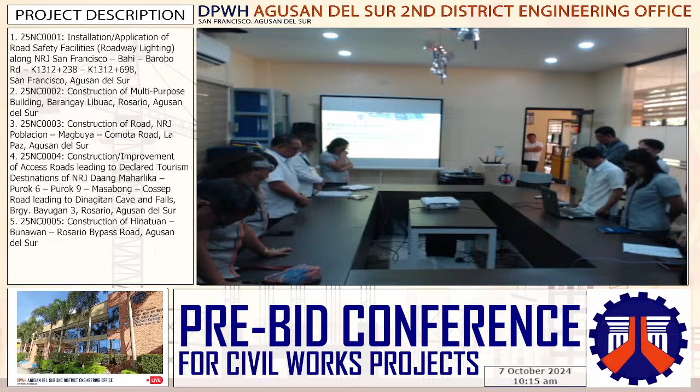In the name of the Father, the Son, and the Holy Spirit. Amen.

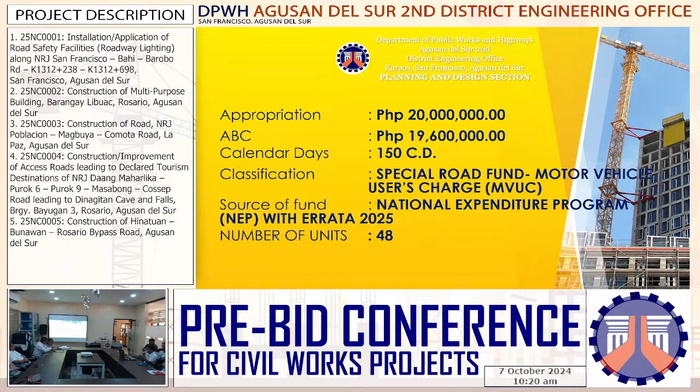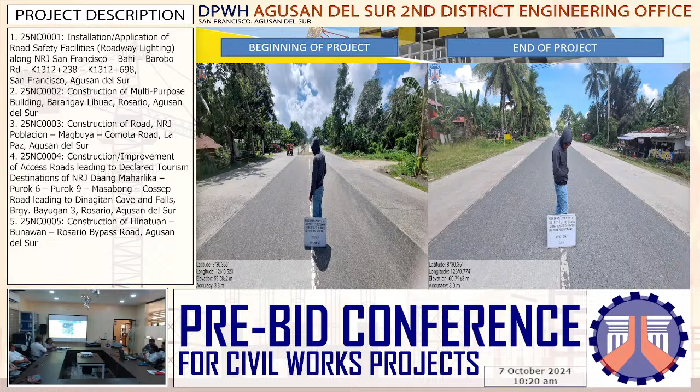So this is the geotagged photo of the beginning and end of the project. And this is the existing solar streetlights along the Bahi, Barobo. So the original plan, the location map, and this is the single arm post detail.

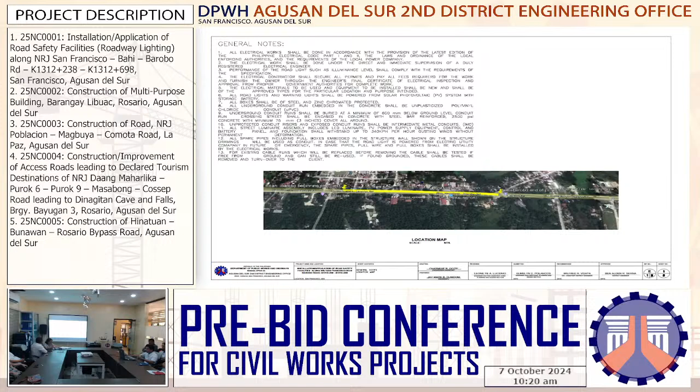So the pole is 12 meters in height with a lower diameter of 250 mm and upper diameter of 150 mm, with a thickness of 4.5 mm. And the mast arm is 1.5 meters. For the LED luminaire details: 200 watts integrated solar street light technical parameters, solar panel monocrystalline silicon, 18 volts, 200 watts.

Battery: lithium-ion grade A, LiFePO4, 35 ampere hour, 24 volts. LED light: industrial grade high lumen chips, 21,600 lumens. Charge time 6 to 7 hours, lighting time 10 to 12 hours per day, 8 to 12 days, up to 20 days. Charge controller: microcomputer intelligent control for circuit protection. Ingress protection IP67, warranty 6 years minimum.

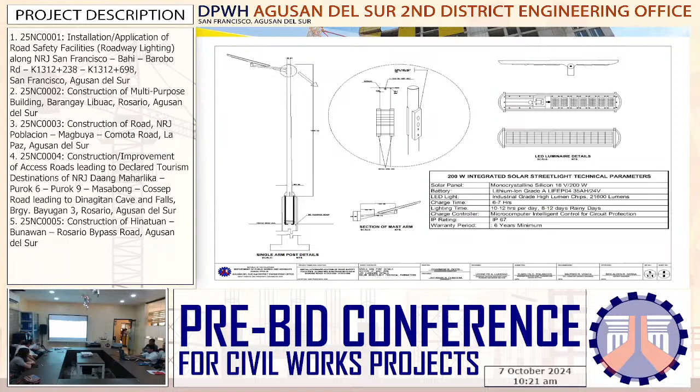For the foundation elevation, the pedestal varies. And for the base plate, the base plate is 500 by 500 by 25 mm. And the lighting arrangement is opposite, or on both sides.

So this is the lighting layout, and the cross sections.

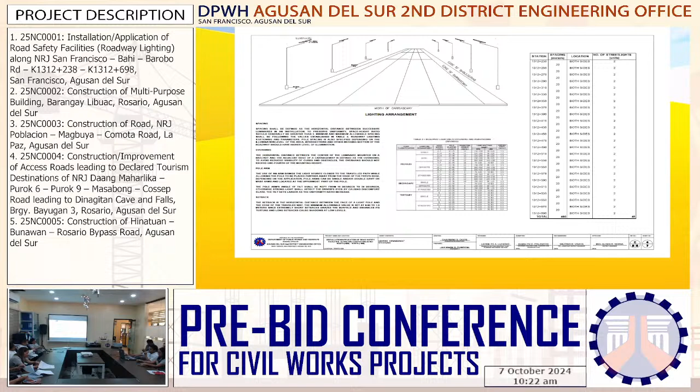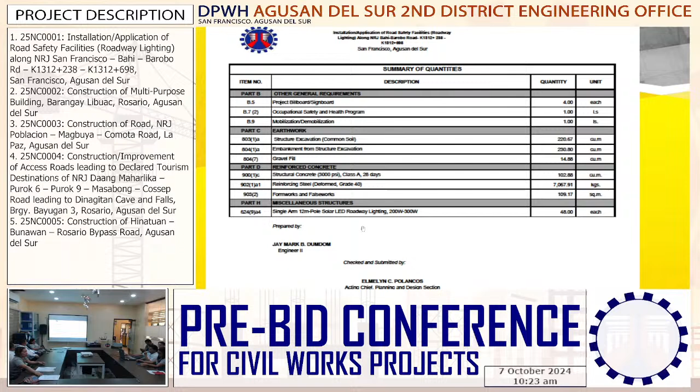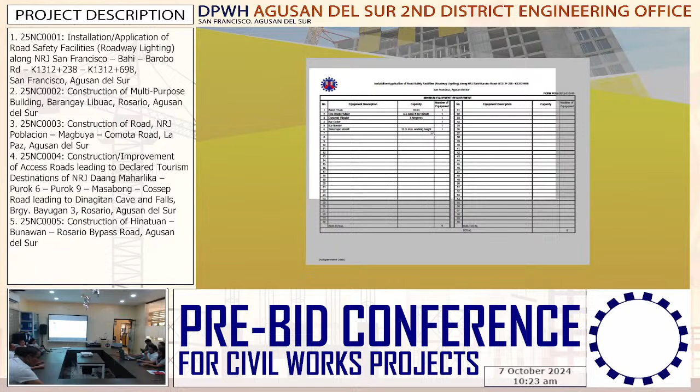For the minimum equipment requirement: boom truck, bagger mixer, concrete vibrator, bar cutter, bar bender, telescopic man lift — 1 unit each. And I think that's all for this project.

Any comments, suggestions from the MAC members? None? Okay, let's proceed to project ID number 2.

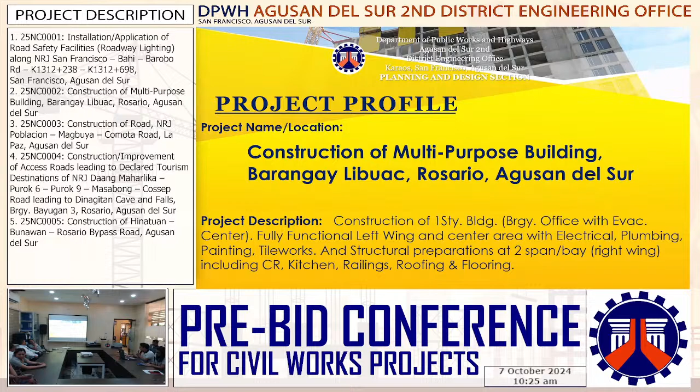Okay, for the next project this morning, the construction of multi-purpose building, Barangay Libuac, Rosario, Agusan del Sur. Project description: construction of one-story building, barangay office with evacuation center, fully functional left wing and center area with electrical, plumbing, painting, tiles works, and structural preparations at two-span right wing including CR, kitchen, railings, roofing, and flooring. Appropriation amount of 10 million, ABC amount of 9,900,000, with a total of 150 calendar days. Source of fund: NEP FY 2025.

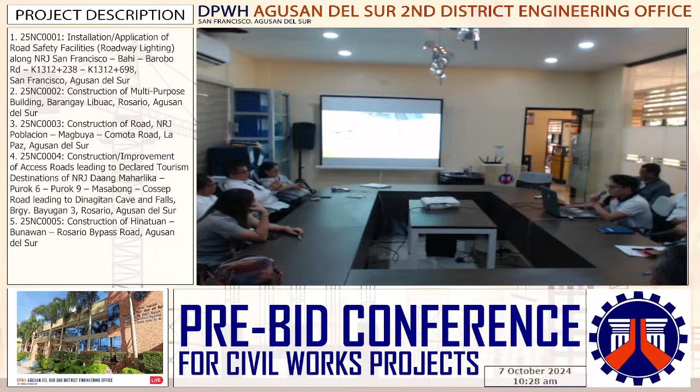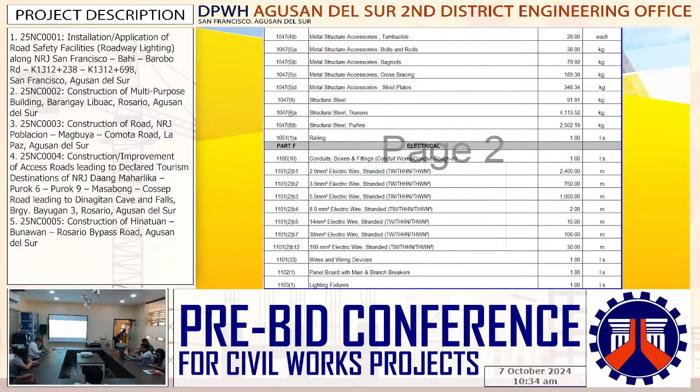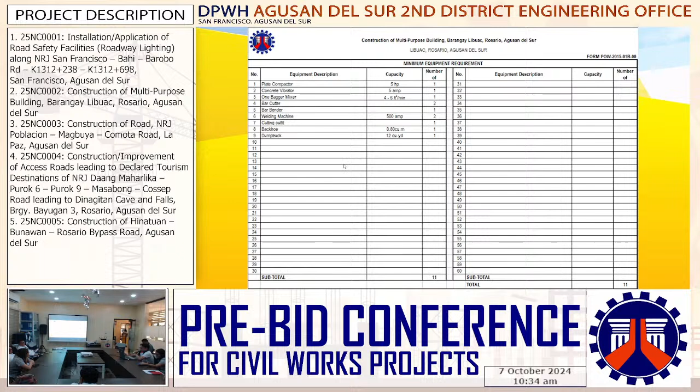This is the minimum equipment requirement: plate compactor, concrete vibrator, 1 bagger mixer, bar bender, cutting outfit, backhoe, dump truck 1 unit, bar cutter, welding machine 2 units.

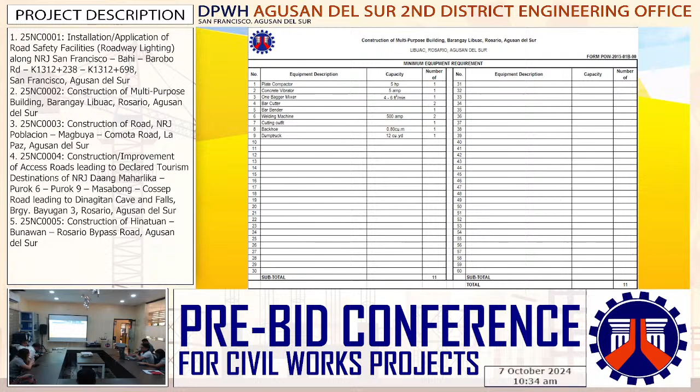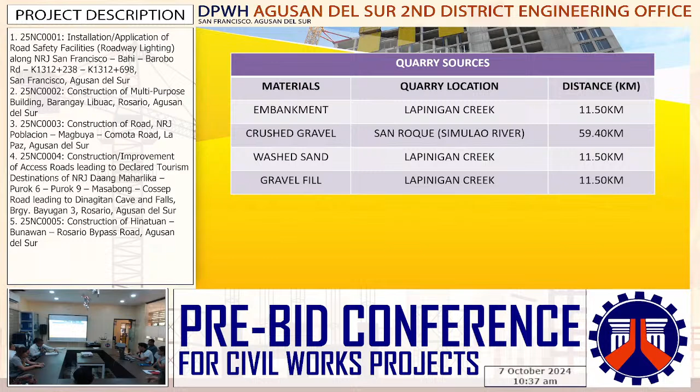Okay, for the MPP at Barangay Libuac, any query, questions, comments?

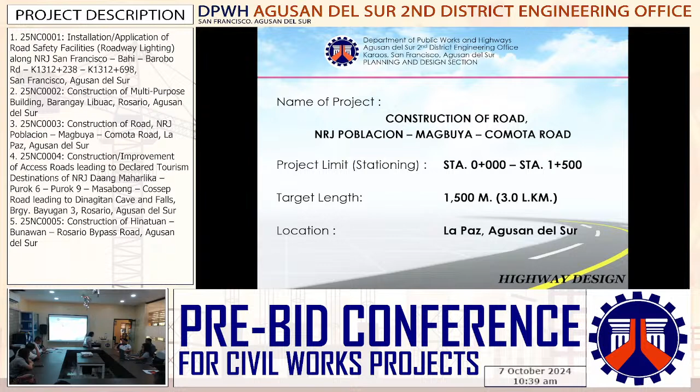For the certification of availability of allotment, road certification, and the original plan and program of works, we have an appropriation of 50 million, ABC of 49 million, 158 calendar days to complete the project, classification road construction, and source of fund NEP 2025.

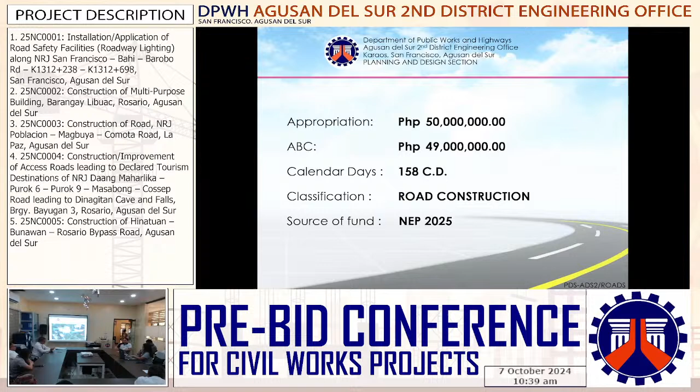So this is the location of the project. This is the existing national secondary road of Butuan City, Talacogon, Loreto, Veruela, Santa Josefa Road. We will have a junction here as the beginning of the project, and the end will be at Station 1 plus 500.

This is the geotag photos taken at the area. This is the junction.

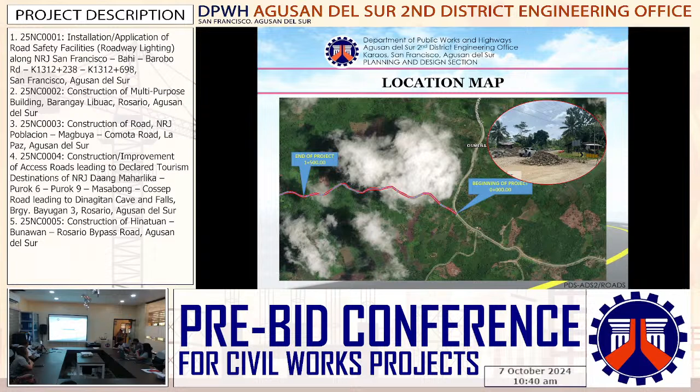For the typical section, we have a carriageway of 3.05 meters on both sides, total of 6.1 meters, shoulder of 1 meter. The shoulder area will have gravel surface course.

Another typical section: total carriageway of 6.10 meters, provision of reinforced slope protection and reinforced canal, and provision of PCCP 150mm thick for the shoulder, still 1 meter in width.

This is the profile and topographic plan, and for the cross section.

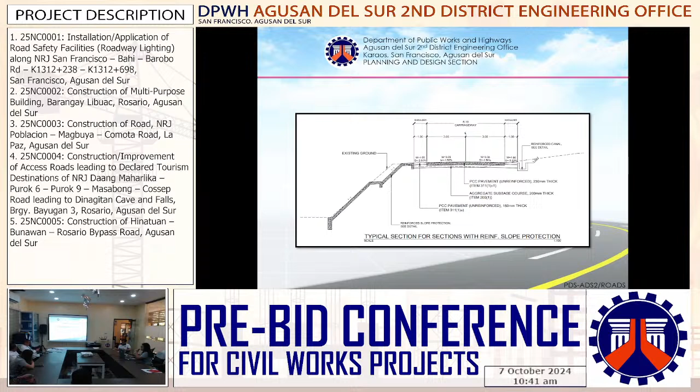For the summary of quantities, we have Part A, facilities for the engineer: construction of field office for the engineer, 1 lump sum; provision of furnitures, fixtures, equipment, and appliances for the field office for the engineer, 1 lump sum.

Item A.1.111 is the provision of desktop computer, specialized software application use, multifunctional inkjet printer, projector, and projector screen.

For Part B, other general requirements: construction survey and staking, 1.50 kilometers; culvert survey and staking, 40 each; miscellaneous survey and staking, 1 lump sum; project billboard or signboard, 4 each; occupational safety and health program, 1 lump sum.

Traffic management, 1 lump sum; mobilization and demobilization, 1 lump sum. For the earthworks: clearing and grubbing, 1.73 hectares; individual removal of trees 150mm to 300mm diameter, small, 50 each.

Surplus common excavation, 10,240.98 cubic meters; structure excavation common soil for the construction of slope protection, reinforced canal, and reinforced wing wall for the RCPC.

768.15 cubic meters; foundation fill for the reinforced canal and RCPC, 109.97 cubic meters; pipe culvert and drain excavation common soil, 314.99 cubic meters.

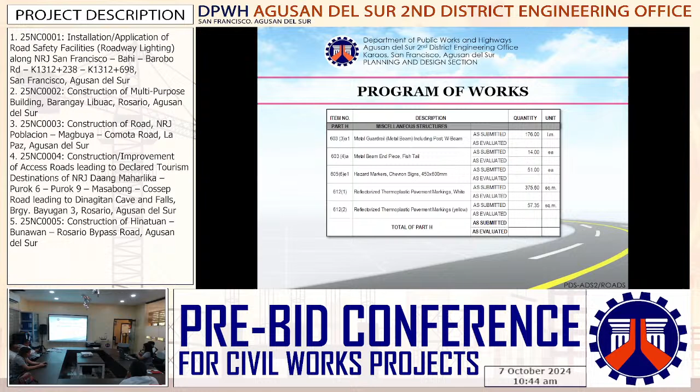For the quarry source, the embankment, item 200, item 300, and sand will be taken from the Comota Adgawan River, La Paz, Agusan del Sur, with a hauling distance of 9 kilometers. And for the gravel, it will be taken from Ojot River, Barangay Remedios, Esperanza, Agusan del Sur, with 89 kilometers hauling distance.

That's all for this project. Any questions? Okay, any comments, question? Sir, go ahead.

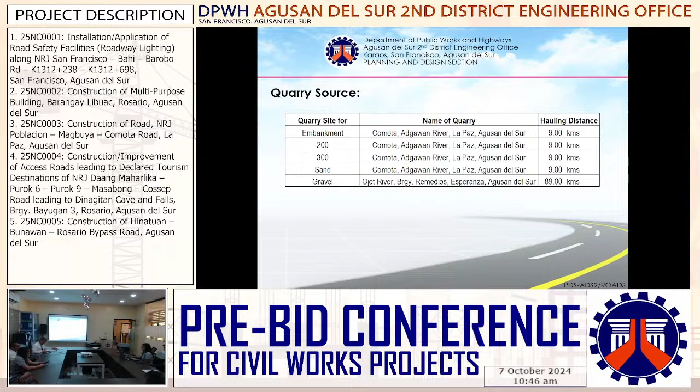This is just for the information now with regards to facilities for engineers. I guess there is facilities for engineers. So you should have a reminder for the contractors that they will have to give this right after they claim the cash advances, no? So that it can be used again. Is that okay? So on the other hand, is that okay?

Since you have already heard about these new fluctuations of the price cost with regard to CPD, expect also the changes and there must be a so-called bid bulletin. So kindly check. That's all, Mr. Chair. Okay, thank you.

Additionally, since in the conduct of project implementation we should conduct testing for all the materials to be used in the construction activity. So there must be testing prior to using the materials. Thank you, that's all. Okay, thank you. No more? Okay, the next presenter for the project.

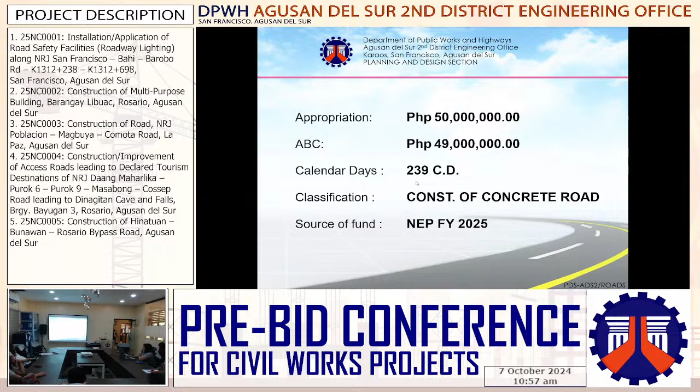So this is under the CPAG project. And this is the location map of the project.

This is the Masabong Cossep, the previously presented project. Then there will be a continuation, construction of Rosario, Bunawan, Hinatuan Bypass Road. And this is the whole stretch of the bypass road going to Hinatuan.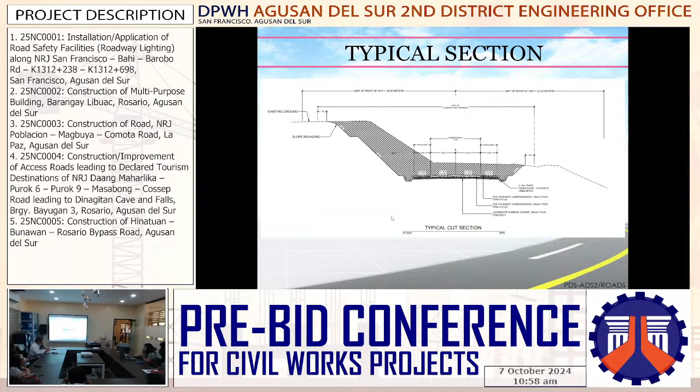So these are the typical sections, the trapezoidal concrete ditch, the cross sections of the project. These are the cut sections.

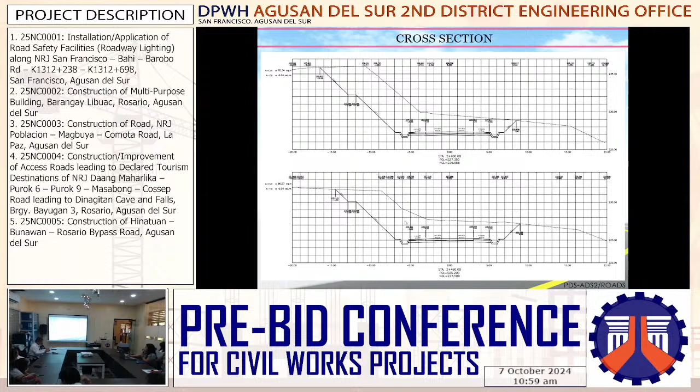For the program of works, we have facilities for the engineer: construction of field office for the engineer, 1 lump sum; provision of furniture, fixtures, equipment, and appliances for the field office, 1 lump sum; operation and maintenance of field office for the engineer, 8 months; construction survey and staking, 1.03 kilometer; miscellaneous survey and staking, 1 lump sum; project billboard signboard, 4 each; occupational safety and health program, 1 lump sum; traffic management, 1 lump sum; mobilization and demobilization, 1 lump sum.

For the earthworks, we have clearing and grubbing, 2.24 hectares; individual removal of trees 150 to 300 mm diameter, 60 each; surplus common excavation.

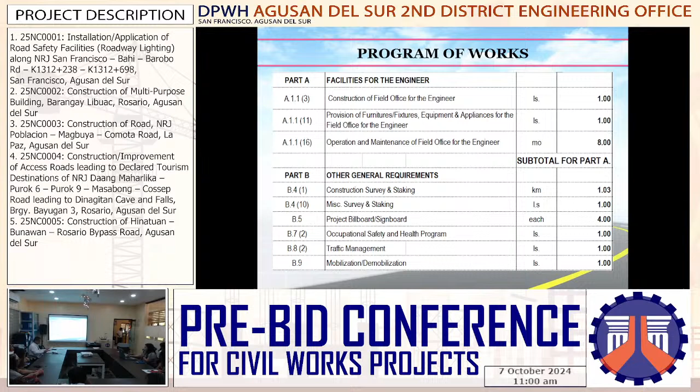40,604.86 cubic meter, and structure excavation common soil of 580.92 cubic meter, and foundation fill of 162.74 cubic meter; embankment from roadway structure excavation common soil of 54.55 cubic meter; and subgrade preparation common material of 11,065.85 square meter.

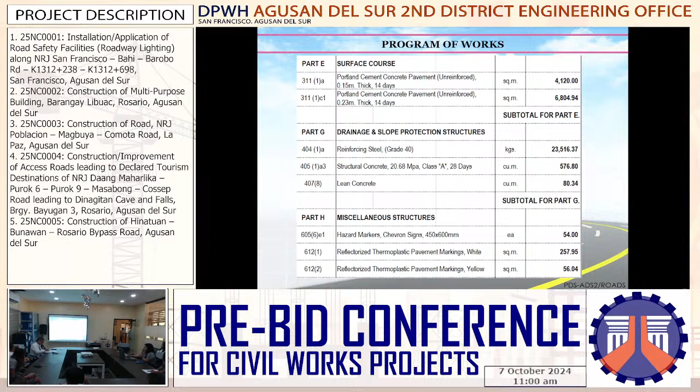And for the sub-base and base course, we have item 201, aggregate sub-base course with 2,609.03 cubic meter. And for the surface courses, we have PCCP unreinforced 0.15 meter thick for the shoulder of 4,120 square meter, and PCCP unreinforced 0.23 meter thick for the carriageway.

6,804.94 square meter. And for the drainage and slope protection structures, for the concrete canal, we have reinforcing steel grade 40 with 23,516.37 kilograms, structural concrete 20.68 megapascal class A of 576.80 cubic meter, and lean concrete of 80.34 cubic meter.

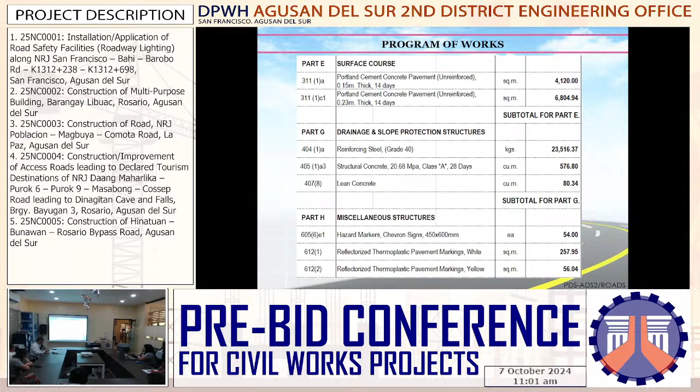And for the miscellaneous structures, we have hazard markers, chevron signs 450 by 600 mm, 54 each, reflectorized thermoplastic pavement markings white and yellow with 257.95 square meter and 56.04 square meter respectively.

And for the quarry sources, we have item 200 will be taken from Salvacion Bahayan River, Trento, Agusan del Sur. Sand will be taken from Agusan River, Barangay Patrocinio, Santa Josefa, Agusan del Sur. And the crushed gravel will be taken from San Roque, Trento, Agusan del Sur.

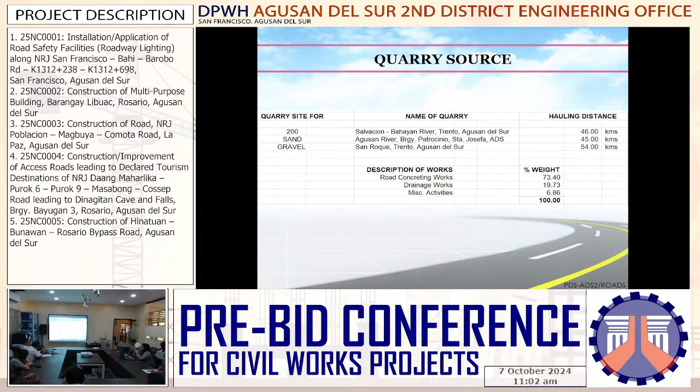And for the minimum equipment requirements, we have dump truck 4 units, payloader 1, backhoe 2 units, road grader 1, vibratory roller, water truck, transit mixer 4 units, bulldozer 1, cargo truck 1, concrete vibrator 2 units, concrete screeder 1, concrete saw, bar cutter, total station, concrete mixer, set applicator machine, kneading machine, chainsaw, plate compactor, bar bender, 1 unit.

And that's all for this project.

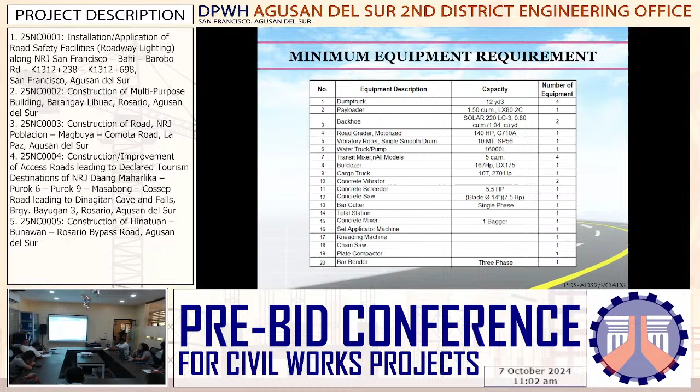And I would like to reiterate that the CMPD of this project was approved October 3, then uploaded today. There were changes, so there is a possible increase in length, and there will be changes for all the projects presented.

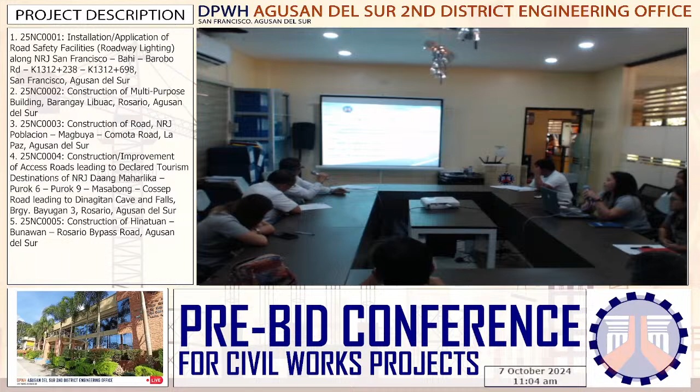Okay, for the one item of works, is there any question from the contractor?

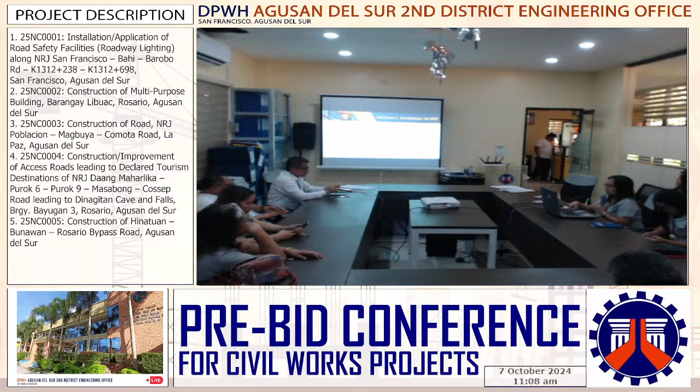Contract ID 25NC0001, Contract Name: Installation/Application of Road Safety Facilities, Closed and Open Roadway lighting along NRJ San Francisco Bahi, Barobo Road, K1312 plus 238 to 1312 plus 698, located at San Francisco, Agusan del Sur, with an ABC of 19,600,000. Scope of works: installation of integrated solar power street lights with pole and pedestal. Calendar days to complete: 150. Bid documents fee of 25,000.

For contract ID 25NC0002, contract name: Construction of Multipurpose Building, Barangay Libuac, Rosario, Agusan del Sur, with an ABC of 9,900,000. Scope of works: construction of one-story building, closed and open barangay office with evacuation center, fully functional left wing and center area with electrical, plumbing, painting, tile works, and structural preparations at 2 span or bay, closed and open right wing, including CR, kitchen, railings, roofing, and flooring. Contract duration of 150. Bid documents fee of 10,000.

For contract ID 25NC0003, contract name: Construction of Road, NRJ Poblacion, Magbuya, Comota Road, located at La Paz, Agusan del Sur, with an ABC of 49 million. Scope of works: construction of concrete road with line, canal, and slope protection. Calendar days to complete: 158. Bid documents fee of 25,000.

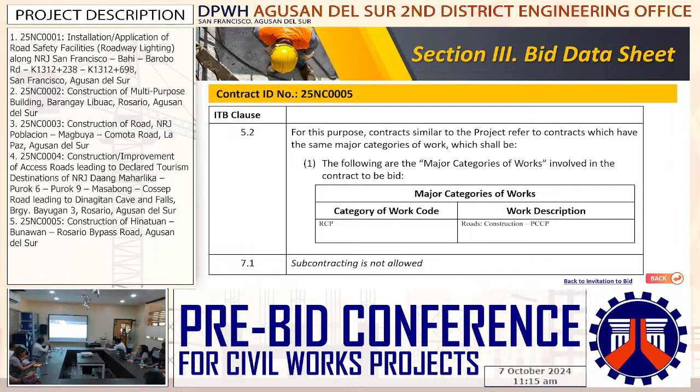Again, subcontracting is not allowed. For the PCAB license, for contract ID 25NC0001, size range small B, license category C and D, largest single project 9,800,000 or 50% of the ABC. Allowable range of contract cost up to 30 million. For the key personnel, must meet the required minimum years of general and relevant experience: PM 2 years, project engineer 2 years, materials engineer 2 years, foreman 2 years, and construction safety and health officer 2 years.

For contract ID 25NC0002, the required PCAB license, size range small B, license category C and D, largest single project 4,950,000 or 50% of the ABC. Allowable range of contract cost up to 30 million. For the key personnel, the general and relevant experience minimum required years: for PM, project engineer, ME, foreman, and construction safety and health officer, minimum 2 years.

For 25NC0003, the required PCAB license, size range medium A, license category B, largest single project 24,500,000 or 50% of the ABC. Allowable range of contract cost up to 150 million. For the key personnel, the required general and relevant experience minimum is 5 years for PM, PE, ME, foreman, and construction safety and health officer.

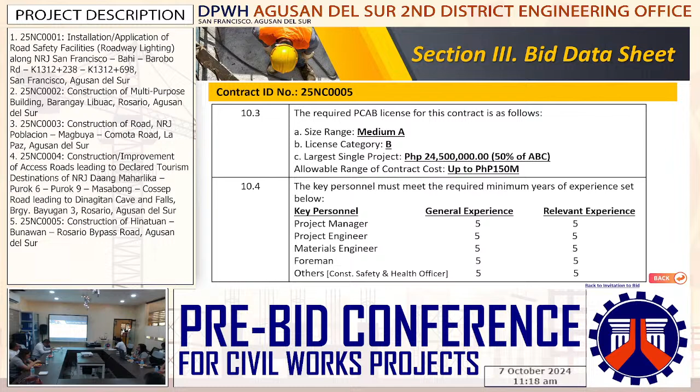Okay, for the 25NC0005, the required PCAB license, size range medium A, license category B, largest single project 24,500,000 or 50% of the ABC. Allowable range of contract cost up to 150 million. The key personnel must meet the required minimum years of relevant and general experience. PM, PE, ME, foreman, and construction safety and health officer must be 5 years.

So for contract ID 25NC0001, the bid security shall be in the form of a bid securing declaration or any of the following forms and amounts: A, the amount of not less than 392,000 or 2% of the ABC if bid security is in cash or in check. B, the amount of not less than 980,000 or 5% of the ABC if bid security is in surety bond.

For contract ID 25NC0002, the bid security shall be in the form of a bid securing declaration or any of the following forms and amounts: A, the amount of not less than 198,000 or 2% of the ABC if bid security is in cash or in check. B, the amount of not less than 495,000 or 5% of the ABC if bid security is in surety bond.

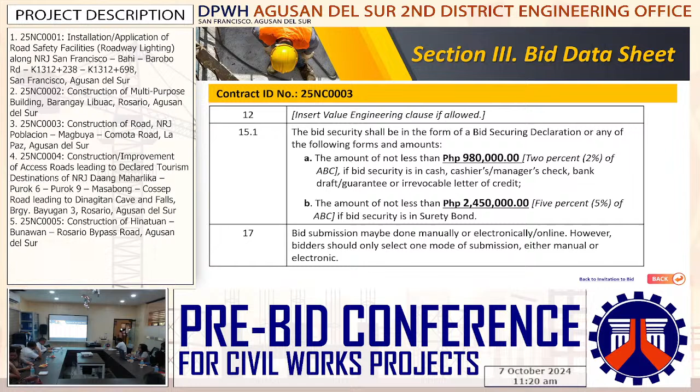For contract ID 25NC0003, the bid security shall be in the form of bid securing declaration or any of the following forms and amounts: A, the amount of not less than 980,000 or 2% of the ABC if bid security is in cash or in check. B, the amount of not less than 2,450,000 or 5% of the ABC if bid security is in surety bond.

For contract ID 25NC0004, the bid security shall be in the form of bid securing declaration or any of the following forms and amounts: A, the amount of not less than 196,000 or 2% of the ABC if bid security is in cash or in check. The amount of not less than 490,000 or 5% of the ABC if bid security is in surety bond.

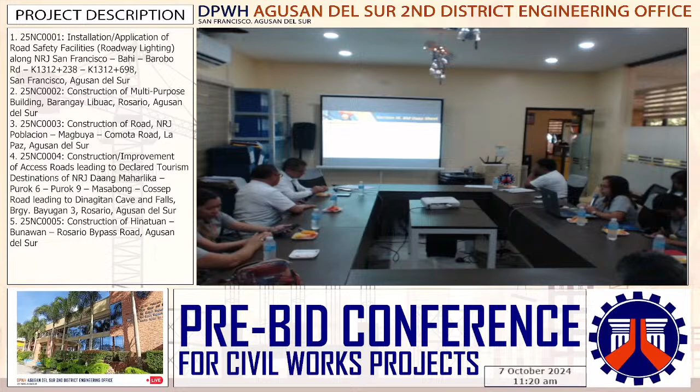For contract ID 25NC0005, the bid security shall be in the form of a bid securing declaration or any of the following forms and amounts: A, the amount of not less than 980,000 or 2% of the ABC if bid security is in cash or in check. B, the amount of not less than 2,450,000 or 5% of the ABC if bid security is in surety bond.

So the address for receipt of bids submitted manually is the BOC Conference Room, DPWH Agusan del Sur 2nd DEO. The deadline for receipt of bids is on October 21, 2024 at 1 o'clock in the afternoon.

For further information, you may refer to our BOC Chairperson, Engineer Wilfred R. Visaya, and our BOC Secretariat Head, Engineer Telma S. Espeso.